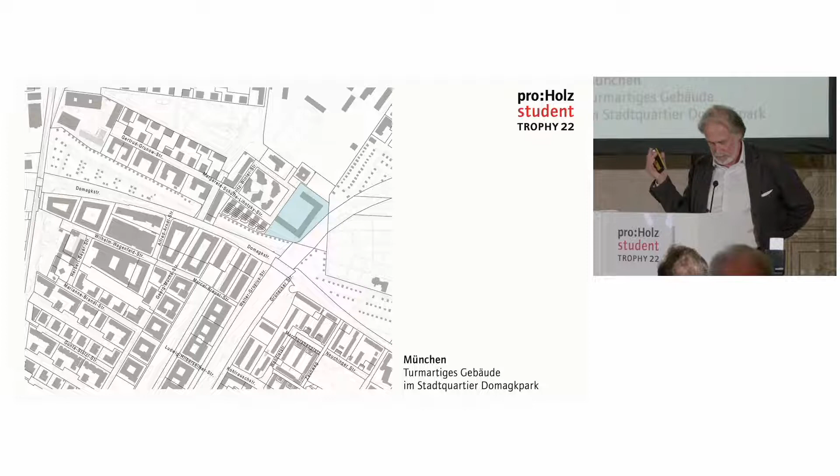It's a tower-like building, and the task was... let me find another picture, a photo from the building with the plan. Once again, this is the task: a new city quarter spanning 24 hectares with abundant open spaces is growing at the former military compound of the radio barracks in Schwabing.

The next place is Berlin. Here we have the House of Statistics in downtown Berlin, which was built in 1968-70 by the former GDR in Berlin. For a long time it was vacant and not used, and it stood vacant for a long time. Now it serves as the starting point for the development of an urban quarter aligned with the public interest, with a wide range of uses affordable in the long term for the city and the district.

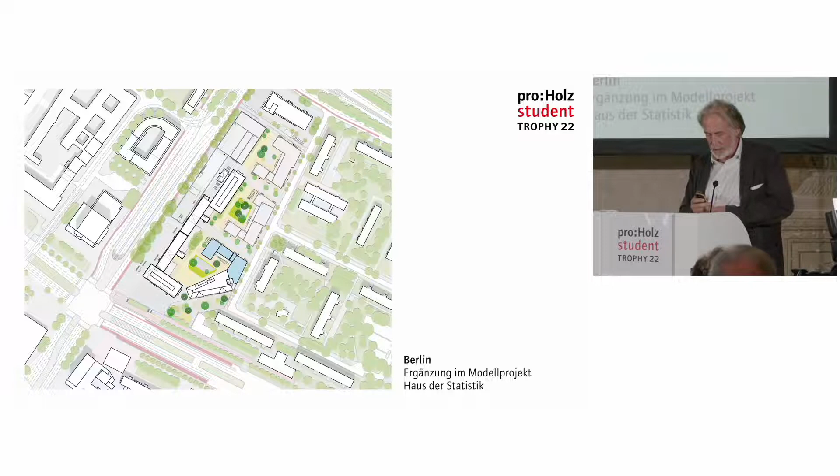Here you can see the House of Statistics at Alexanderplatz in Berlin's city center, at the Karl Marx Allee, a very prominent place in the former GDR. Here we have this field where the participants were invited to bring in their ideas.

Then we can see here once again the picture of the task for the Vienna building, the housing complex Karl-Kysela-Hof in Vienna's 16th district. It consists of two 9-story tenements set parallel to each other and surrounded by ample green spaces. The complex is a typical artifact of the housing boom of the 1960s and 70s, and the project site is a car park at the northern edge of the housing complex with 87 above-ground parking spaces.

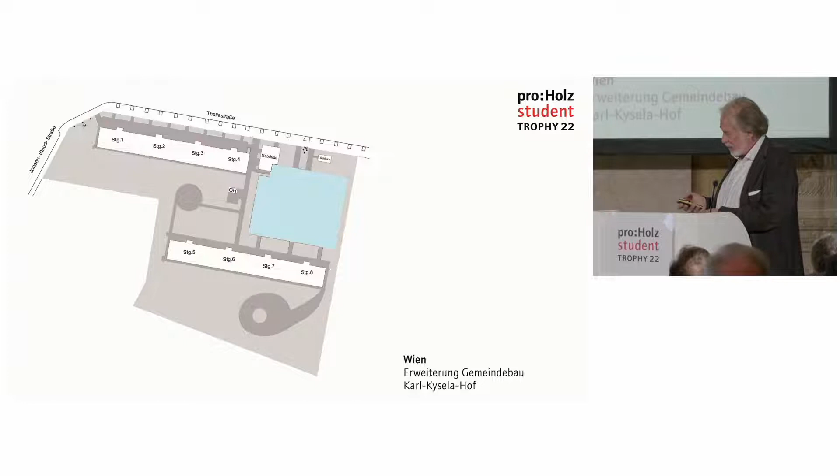Here you can see it on the plan and the ground plan. They are oriented internally and it is very spacious, but it is also drifting out with regard to the green space, and we have to use it properly. The task was to bring in ideas now with timber construction extensions.

Then we had the evaluation criteria, that the urban development construction task had been translated into current situations, also with regard to the topic of affordable housing. It should not only be used experimentally from a timber construction point of view, but there should be a partnership between students, architects, and structural engineers, so that all three parts are involved as in reality, cooperating, and not only the planners or designers, but also working with the construction engineers and structural engineers.

Also with regard to the systematic of the construction, the logistics were very important, because a hybrid concrete-timber construction is a very important topic here. It was also important to show the functional and innovative quality of the construction and the transferability of the systemic wood construction solutions, and how the efficient and smart use of resources in an urban context is possible.

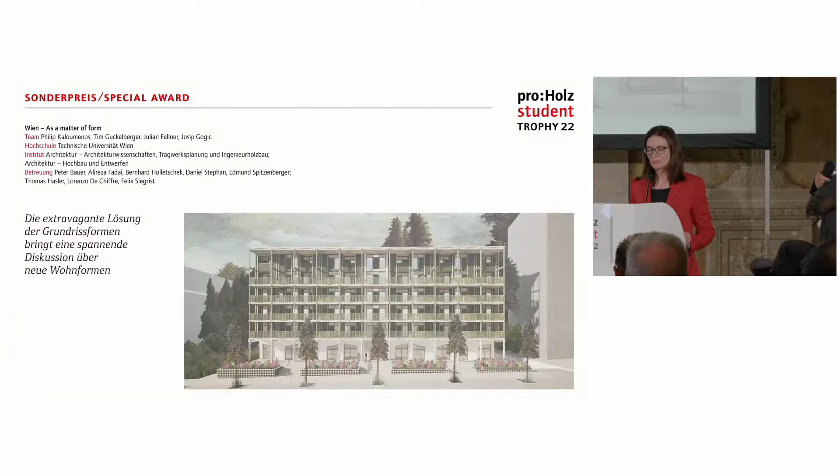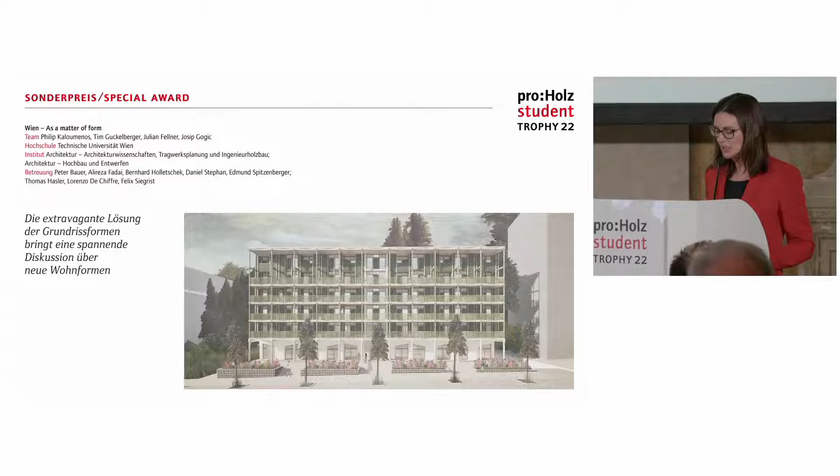The project team is Philip Kaloumenos, Tim Guckelberger, Julian Fellner, and Josip Gogic from the Technical University of Vienna, from the Institute for Architecture and Designing, the Institute for Architectural Sciences, the planning of structural frameworks, and timber construction engineering. We would like to thank all the students and all the supporters. Now Helmut Rinhofer will give away this special award.

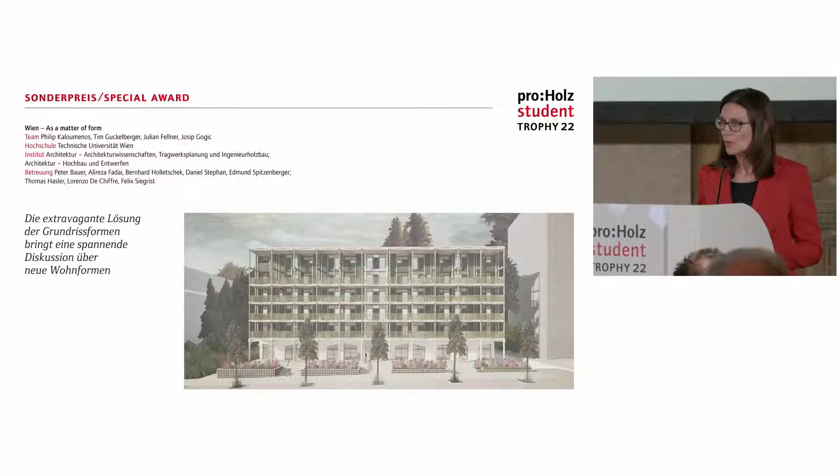The award goes to the representatives of the project teams. Mr. Helmut Rinhofer will give away the award, and Michael Schluder, the chairman of the jury, will also be here.

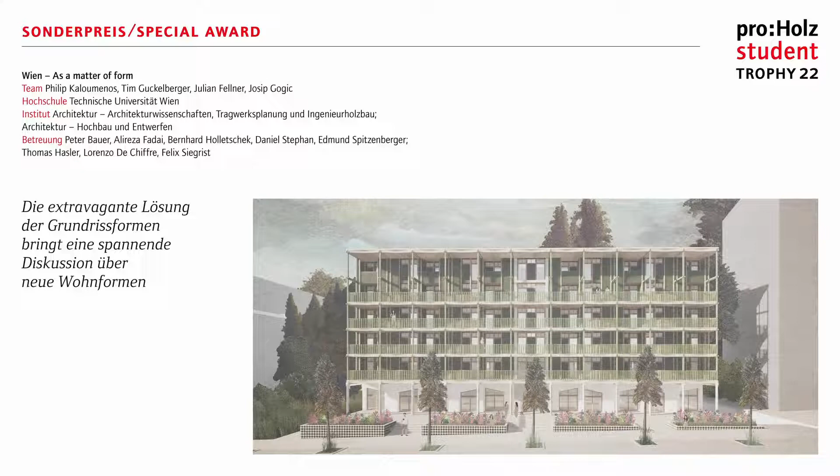Michael Schluder will now say a few words about the project. Congratulations on your project. This was an expansion of the existing line of buildings, quite a serial and very good construction, convincing because of its variability and multifacetedness between the rows. We can see a very clear system and zoning: on the topmost story, a split level and two-story apartments, and below, different shapes of apartments. Congratulations on your contribution.

We would now like to take a picture of the winners of the prizes.

Let's now come to the building site Munich.

We have two special mentions and one prize winner. The prizes will be awarded by Alexander Bogner.

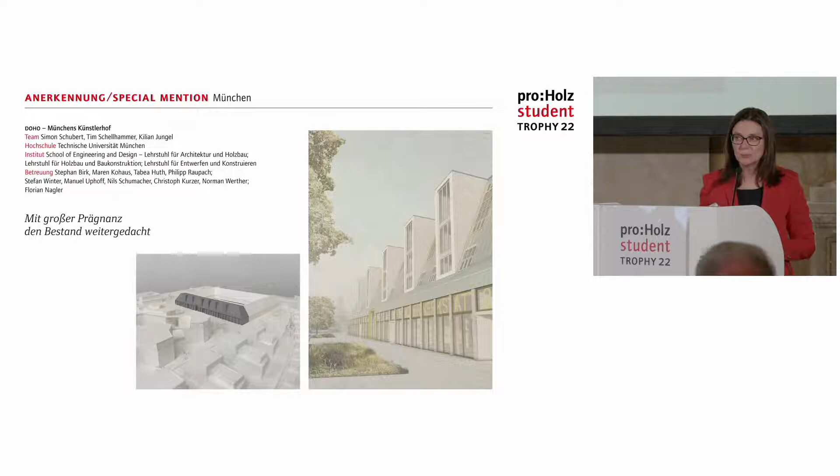The first special mention has the code word with lots of conciseness. The existing buildings were thought further. The Doho München Künstlerhof project was designed by the team Simon Schubert, Tim Schellhammer and Kilian Jungel, from the Technical University of Munich, School of Engineering and Design, chair for architecture and timber construction. I would like to ask the team to come to the floor and Michael Schluder to say a few words.

First of all, congratulations to the participants for this really nice project. We discussed a lot about the urban development approach and about the constructive topic. It was really very well adapted in the jury, because in the middle there is an extension, and at the same time you have made a closed building, the existing U-shaped complex, into a quadrangle.

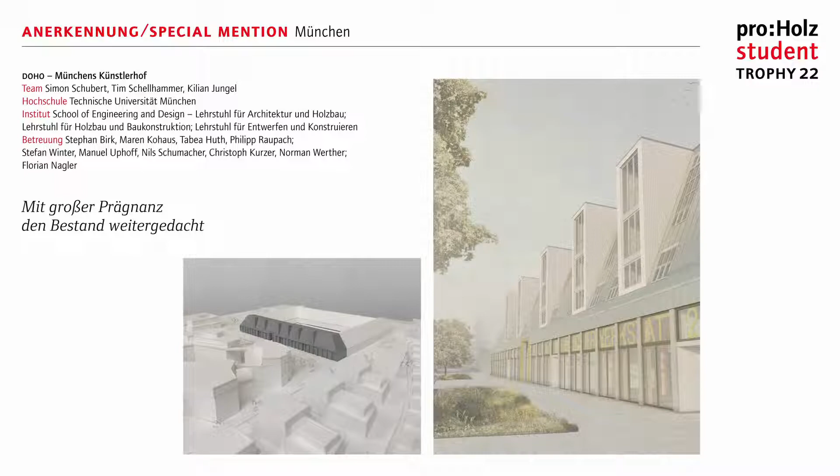This means that the jury had discussed that we could perhaps have made it more transparent, which is used by the artists. In terms of construction, this competition entry is particularly well articulated down to the details. Really a great solution for this task. Thank you very much and congratulations. Thank you very much.

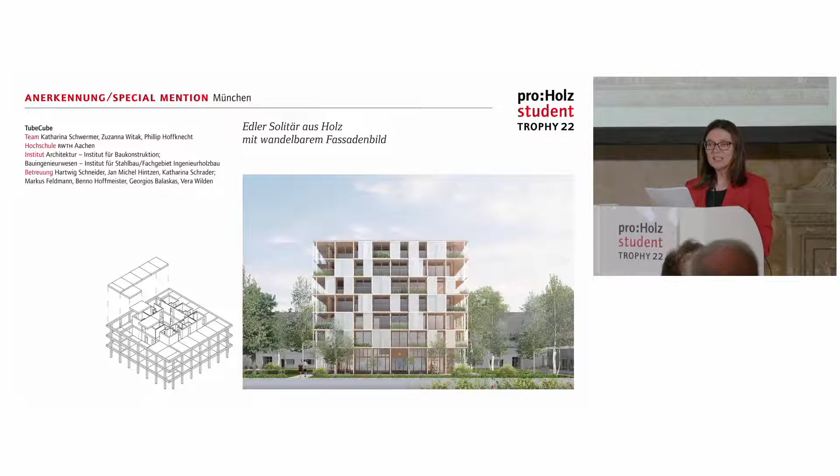We come to the second special mention for the Munich site, Solitär aus Holz, the freestanding solitaire, set perhaps a bit too centrally, from the team Katharina Schwermer, Zuzanna Witak, and Phillip Hoffknecht from the Technical College Aachen, from the Institute for Constructive Engineering. I would like to ask the team to come to the floor and Mr. Schluder for his explanations.

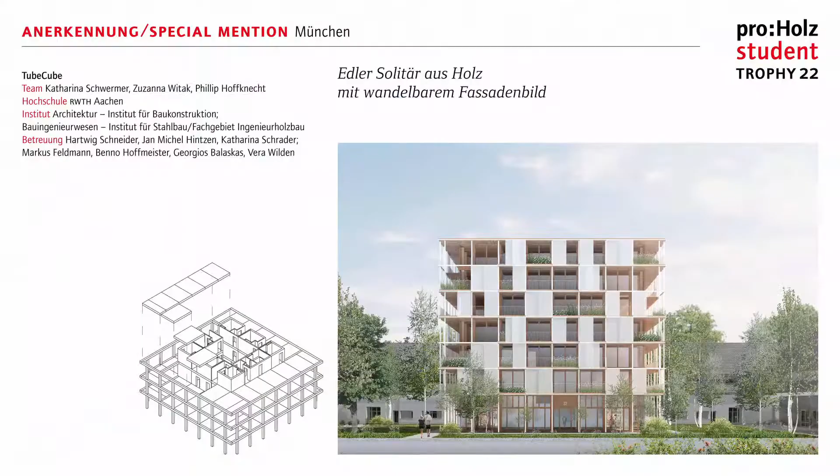Congratulations for your contribution, really. There was another urban constructive approach, because in this U form you have found a center, and the center towards its open facade, as it was also discussed, it was a nice network with the surroundings and also the courtyard, and also with the constructive approach of the statics, with the core in the middle, and then symmetrically with the concrete core, vertical load transfer through cross-laminated timber walls and columns.

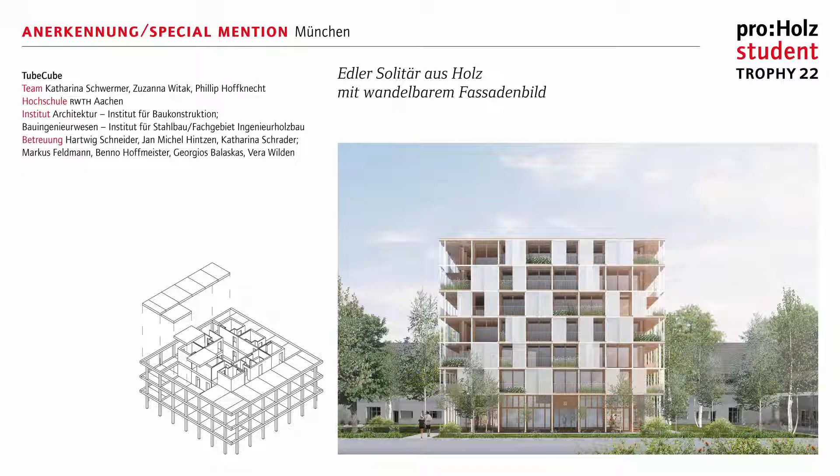And here also a lively facade structured by sliding sunshade elements. This is really a very special topic, and the cube is a freestanding solitaire. It's set perhaps a bit too centrally in the courtyard, but the new building appears refined in contrast to the existing structure's coarse impression. Thank you very much, congratulations.

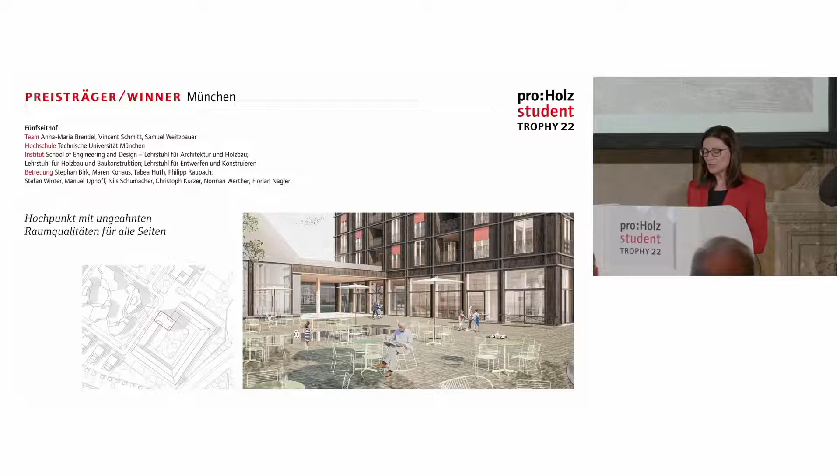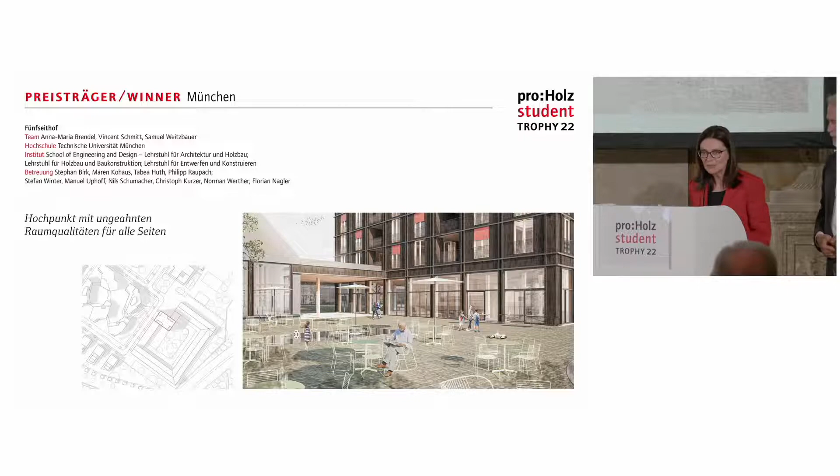Now we are passing to the winner for the Munich site. It's a 5-sided court convincing in its urbanistic configuration. The team of this project are Anna-Maria Brendel, Vincent Schmitt, and Samuel Weitzbauer. This is the project 5-sided court, a contribution from the Technical University of Munich, School of Engineering and Design. I would like to ask the team to come to the stage, and Mr. Schluder will say some words and explanation to the project.

I would like to congratulate you for your great project. There were a lot of discussions before our decision, because this was really great as an urban development solution. It was the best, therefore the winner for the Munich site, and because also your constructive approaches which have been realized here.

I would just like to explain this. We have two slides that I would like to show you, which explain the project in more detail. We have here the project 5-sided court, which is compelling in its urbanistic configuration, with the two arcades offset from each other and connecting the existing structures. A residential and studio building 25 meters high forms pleasant, proportionally outdoor spaces.

With cafés, and the inner courtyard towards the existing U-shaped art courtyard, a new neighborhood square towards the adjacent youth center. The single-story structures are partly transparent filters and partly suited as exhibition spaces. This makes for very accepting zoning of public and semi-public spaces.

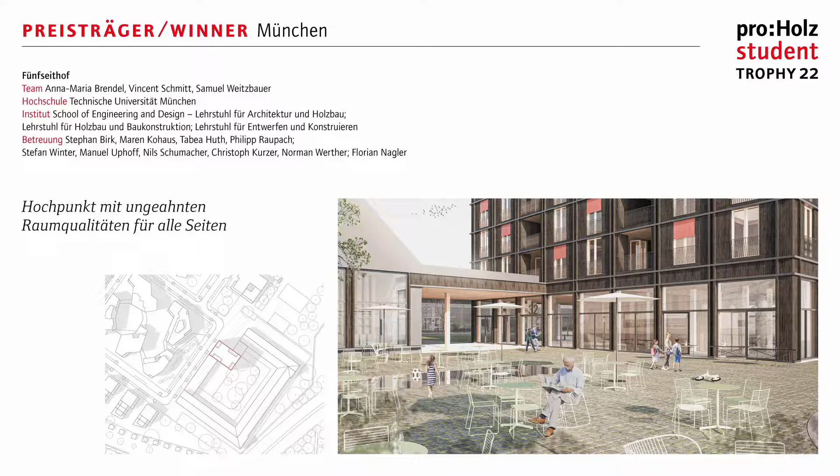This moreover demonstrates that a high-rise build with wood can be a benefit to the site. This means that we really have great urban development construction motives, and this is very important, also to show you here this picture how you have developed this.

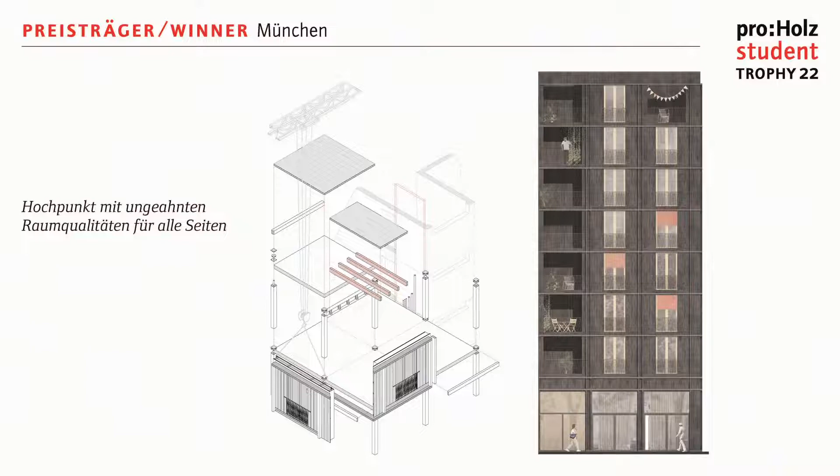Timber construction in urban development, also with regard to costs, it's always affordable housing that we are working with, modules, wall and floor modules, and also the facade, and that stringent topic is not only mere, but really also the quality which is stringent. This was our convincing project in the Munich site, and therefore you are the winner in the category. I wish you all the best for your future, and congratulations.

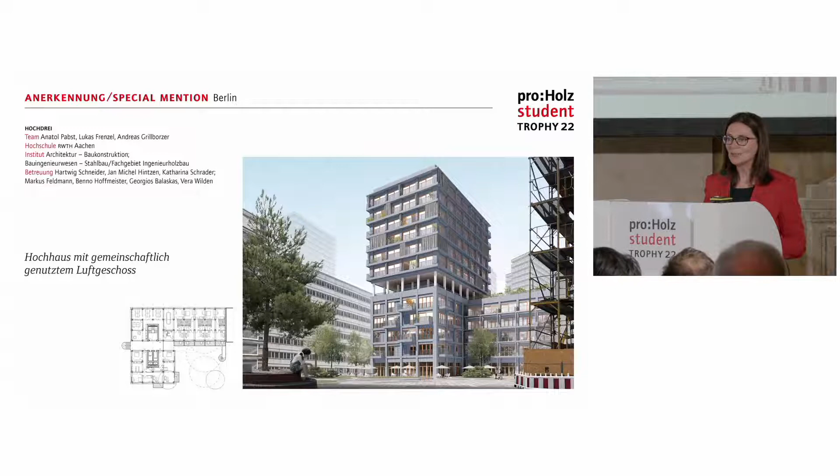Katharina Schrader will receive the award representing her colleagues. And Michael Schluder will explain the project.

Well, it's very good when you can just receive such a prize for your colleagues and representing your colleagues. So particularly among the students, there are so good friendships between the colleagues. And when I look back at the time when I was studying, so in this student surroundings, there are great possibilities. I would like to say a few words about the project, why it was selected.

So before I mentioned the former House of Statistics, and I showed it on the site map. And here we can see in the immediate environs, this is the House of Statistics. And this creates a kind of a closed courtyard.

And the addition is now attached to this courtyard. And this extension, this addition, was selected by the project creators to form 3 building volumes. So here we have a solitary building, a freestanding building, which is separated from the other parts and which becomes permeable.

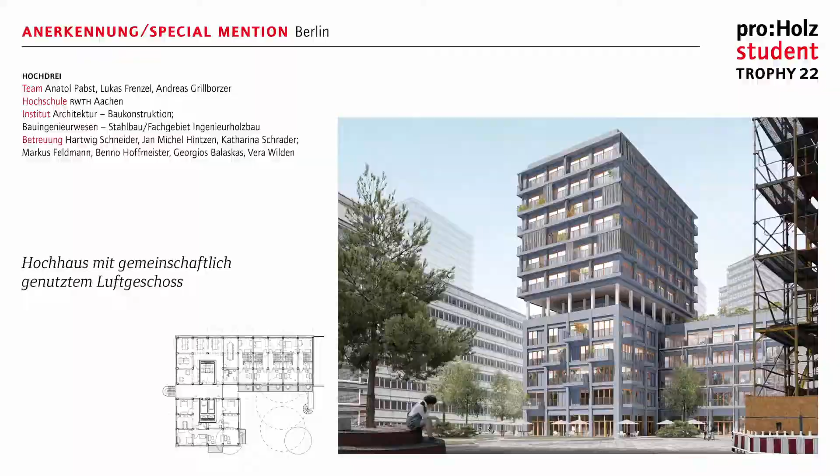And the third volume is the third part that is just put on top of the other part. And here we can also see we have a very good deflection of forces. Also, the floor plans were very convincing because the floor plans were selected such that the residential units then offered opportunities also for some shared areas. And for these reasons, we...

...chose this special mention and a special award. And it's a pleasure for us to give this prize to you, but we will hope that you will forward the award to your colleagues.

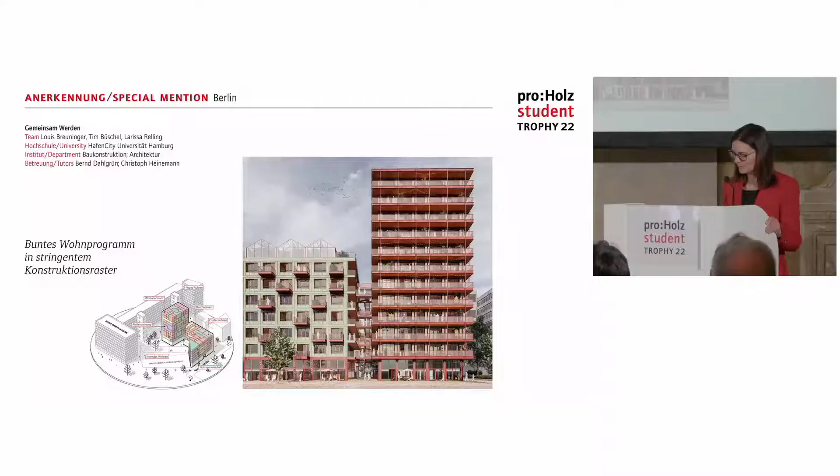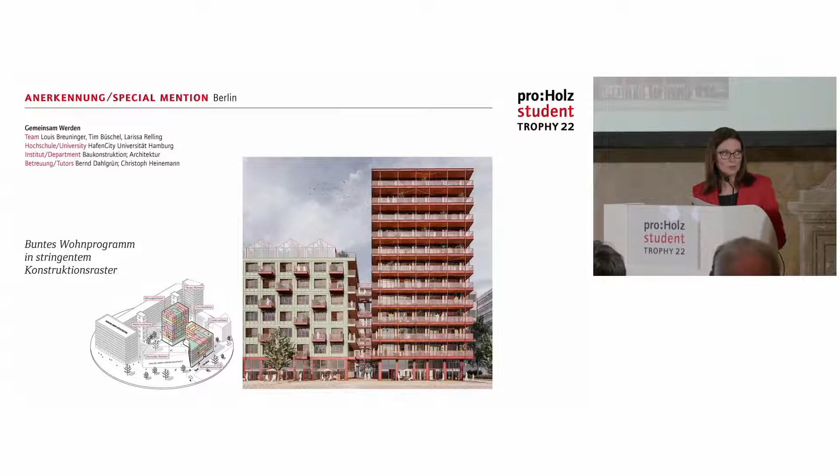The second special mention for the building site Berlin offers a varied residential program in a stringent construction grid. The project, which is called Gemeinsam werden, Becoming Together, was drafted by Louis Breuninger, Tim Büschel, and Larissa Relling. They are from the HafenCity University Hamburg and the Institute of Building Construction and Architecture. Now I ask the team to come to the stage, and again Michael Schluder to explain the project.

Congratulations, and it's good to have you here, that you took the long way from Hamburg to Vienna to receive the award. Well, actually, I think you are a lot better at explaining the project, but I just want to say that we selected this project because we can see a very good addition and completion of the existing buildings surrounding that. So here you can see this is the former House of Statistics with the adjoining flank.

And now we have this compact building, and this also forms a connection to the neighboring buildings. So here we can see a residential building. And you also made a special design of this and a diagram. So we can see the architecture is very striking at different levels, with different design of the residential apartments.

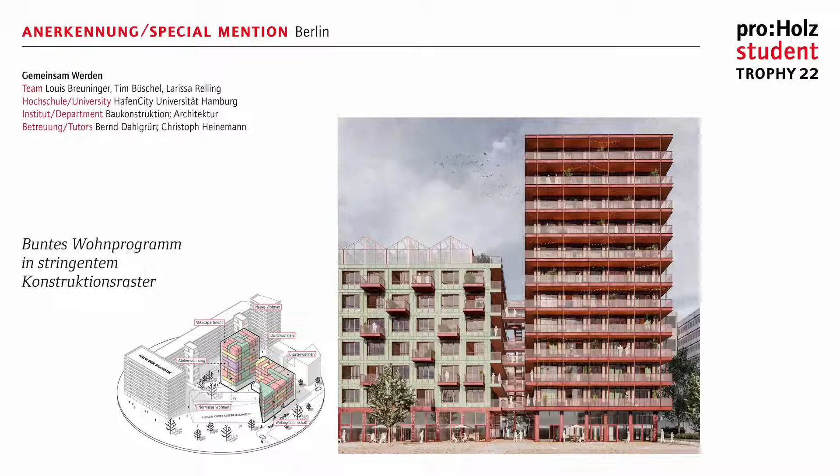With regard to the construction, the problem was shown that in constructive timber construction, there is this problem that when you have the superordinate structure of apartments, you also have to take some preventive measures. I would not call it a problem, but these are approaches in timber construction that you have to study thoroughly, for example, when it comes to the transfer of sound and so on. So the detail was very well elaborated, and really it is a very good project. Congratulations.

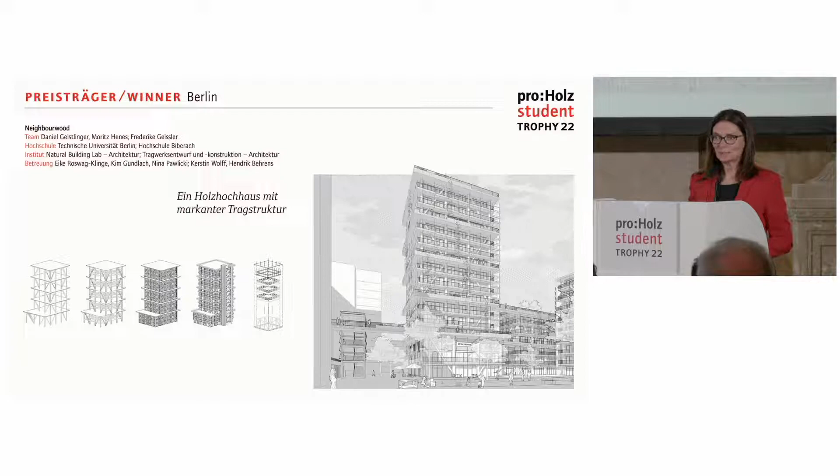I would like to ask the team to come to the stage. Congratulations, you really did an excellent job, and we selected this project to be the winning project.

We, of course, put in the foreground different approaches, and one of them is the urban planning approach that was fulfilled perfectly. So we have this situation here that also in this elevation and this superordinate structure of the surrounding buildings, you found different levels. There is this basic level that is added to the public space.

We have the semi-public area, which involves corridors and which then combines and gets into contact with the existing buildings surrounding this site. And then we have the private sphere, which is addressed not to the quarter, to the surrounding quarter, but to the private level. Here we can see these free spaces are very good for communication and for these new forms of living and residential being. This was presented in that way.

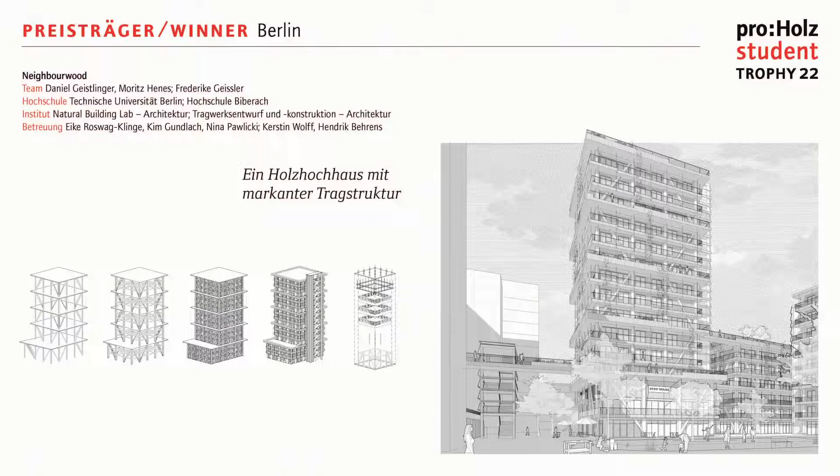And then the separation was made into three parts. So there are three levels, three stories, and this also provides the possibility that you have this grid. The grid already existed, and that was predetermined. And now also this first dimension could be elevated and included into the second level. So this really offers a huge variety for the further development of the project.

So the urban planning, also the constructive thinking, and the problem solving made us choose this project as the winning project.

And in the jury, there were so many members, and we also talked to the person who developed this quarter, and also congratulations from her about your project.

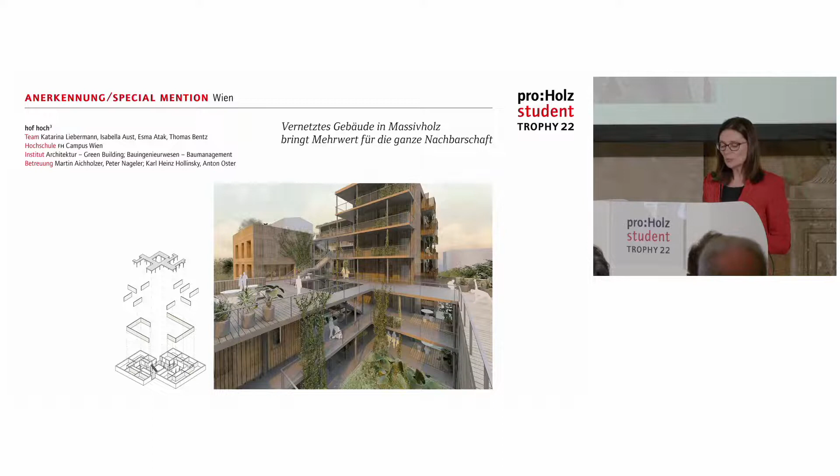This is an interconnected building in solid wood, which adds value to the entire neighborhood. The project Hof hoch 3 with the team of Katarina Liebermann, Isabella Aust, Esma Atak, and Thomas Bentz from the University of Applied Sciences, Campus Vienna, and the Department Architecture, Green Building, and Construction Management.

I would like to ask the team to come to the stage.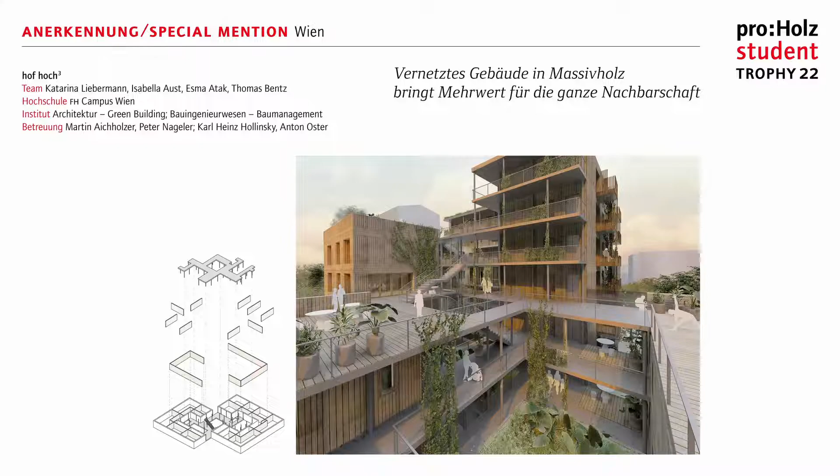Congratulations. You have also really elaborated in detail very well, and with all the criteria, all the best for you.

The second special mention for the building site Vienna goes to a project enhancing the neighborhood with big and small wood building cubes.

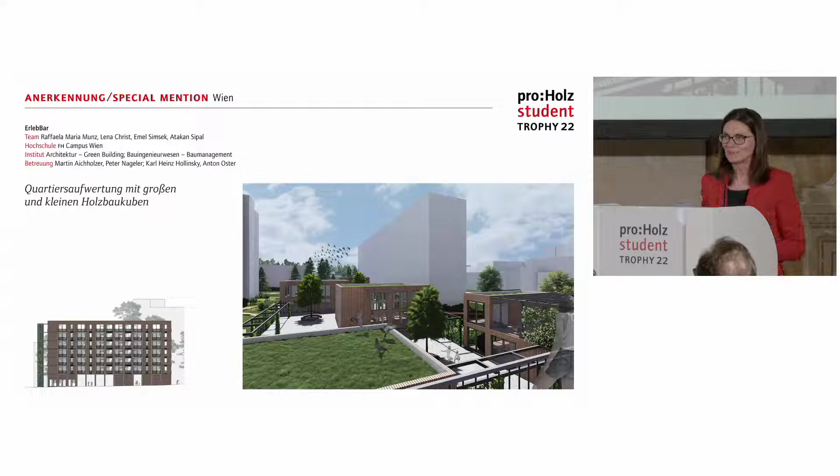The project ErlebBar, with the team of Raffaela Maria Munz, Lena Christ, Emel Simsek, and Atakan Sipal, from the University of Applied Sciences Campus Vienna, architecture, green building, construction management. I would like to ask the team to come to the stage.

Congratulations for your excellent contribution and for the special mention we have awarded. The criteria was very important. The urban planning approach was very interesting, with the residential building as a simple oblong structure set at a right angle to the street, and then five further low structures for community facilities set between the existing buildings, organizing the open spaces into smaller, well-scaled places and enhancing the entire neighborhood.

This project was selected above all for its conceptual approach. The design shows how wood construction can contribute to enhancing the existing urban fabric if it is embedded delicately, as in this project. And this is what we found so special in this project.

Also with the pavilions in the green space, we have more intimate spaces in the bigger volumes of the building structures. Here you can see it really well in this picture.

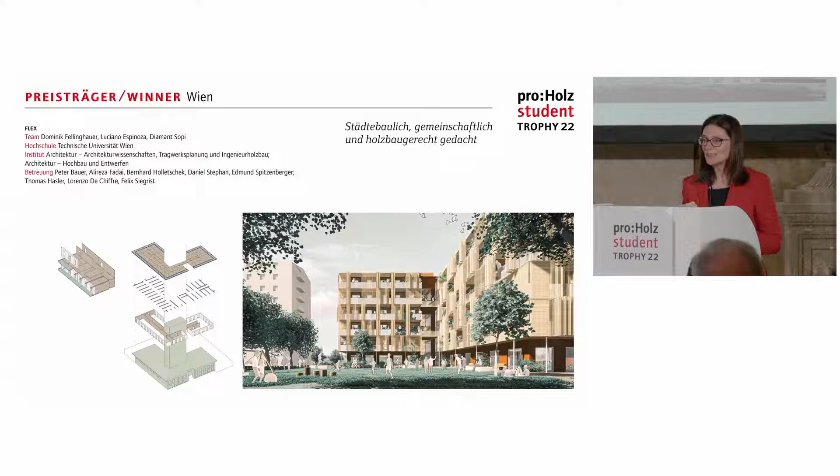The project Flex, with the team of Dominik Fellinghauer, Luciano Espinoza, and Diamant Sopi, from the Technical University of Vienna, Department of Architecture and Design and Architectural Science, Structural Engineering, and Timber Construction. I asked the team to come to the stage.

Congratulations, the constructor is not here. There should be a third member here of the team, but you're only two now. Great contribution, thank you very much for your project.

We had many discussions in our jury about how we are dealing with the urban planning approaches and the two building complexes. What is compelling about the housing project Flex is its approach to urban development. An L-shaped structure, slightly broader than the existing buildings, binds these and the open space together as an ensemble. The two-story ground floor is set back, making for a fluid transition from the green spaces to the building.

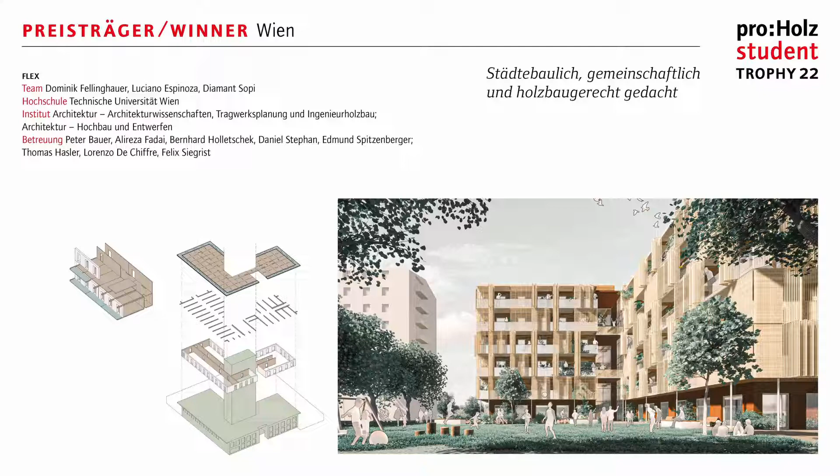Above this mineral ground floor rises a five-story wooden structure, based on a strict grid, which permits flexible floor plan designs. Set in the building's inside corner, the stairwell becomes a communication zone that invites you to linger, and this staircase can also be used as a kind of public space.

This is a bigger staircase than it needs to be, and it is also in proportion with the entire building complex. It shows that on a level of urban planning and architectural approach, you have a good synergy, and you have really planned this on one level, on one quality. And therefore we decided unanimously that you are the winner of the Vienna building site project.

It's very special for us, a special day today, that the guests from Berlin and Munich are here too, so that you can show the winners from Berlin and Munich your ideas and projects, report about them, cooperate and discuss together, so that you're not only working for yourself but that cooperation is the higher topic. That is also a part of this ceremony. Congratulations.